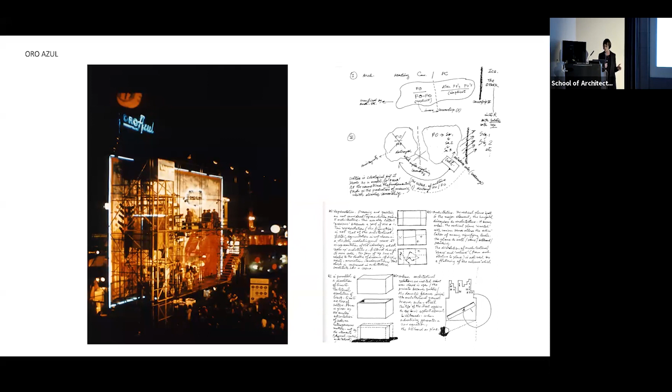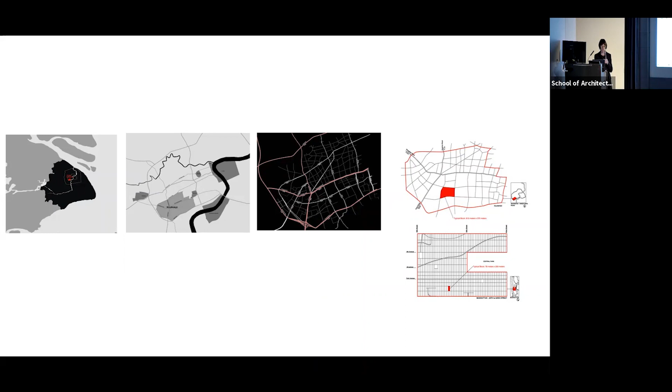The important thing is that this was a place where many concepts were explored. It was about creating disparate connections between different areas. Actually, if anything is about reading the city, this was it. In a certain way, there are also questions of the narrative of each of these places. We started this with Mario Gandelsonas — when I talk about projects I did myself, I'll say so too. And here there were 6 different areas that we dealt with in detail.

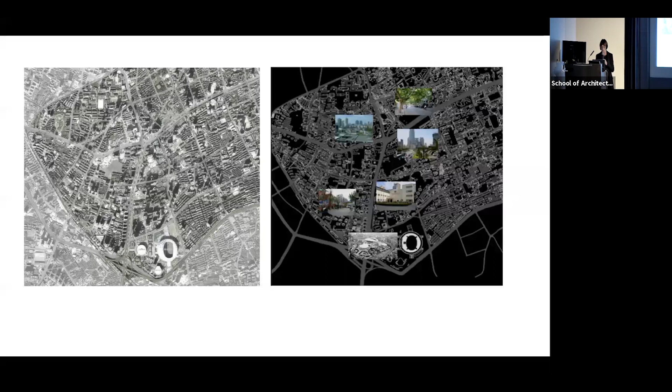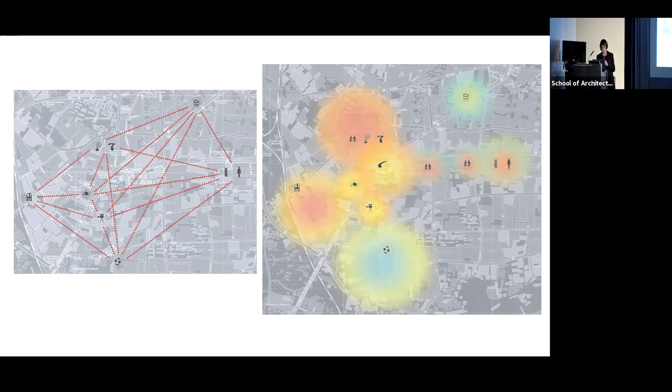Here they're represented — one of the issues was to establish, first, the concept of network, and second, the concept of point of energy, a kind of urban acupuncture, whereby these otherwise disconnected activities and narratives across a very large area — a sports center, an antique center, a technological university, traditional Chinese medicine and modern medicine, a business district, et cetera.

Here's a plan that shows these different elements. It's like organs without a body, or a body without organs, whichever way you want to take it. So you go from the mega sports area to the fabric of the design antique area, to the film center, to a business center, to a Xujiahui Square, which is enormous, and so on and so forth.

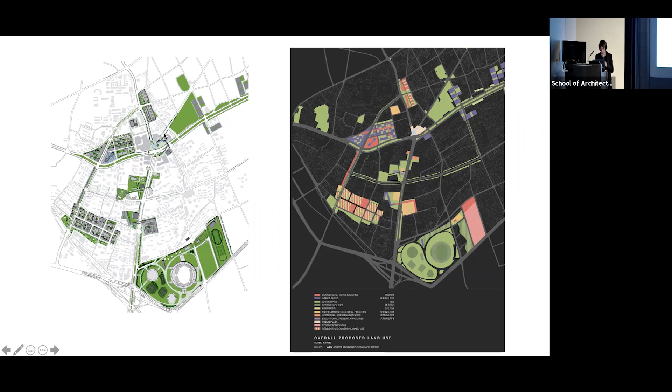Here's one of my preoccupations that was always there: the green. This is not nature in any transcendental way, but there was very little there, so that's one of the things we addressed. And what's on the right, more importantly, is the multi-layer aspect of this plan — going from the different land uses done in a more systemic way, but also traffic, sustainability, and any number of other layers.

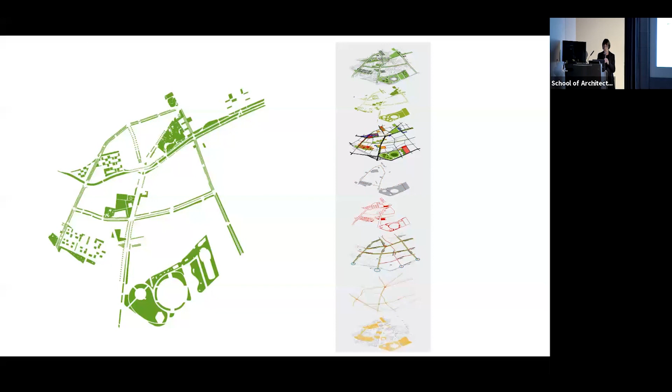So I'm going to show just three of the projects that we focused on. One being the Xujiahui Square, which was — I think it still is, I just saw an aerial view, haven't been there in a long time — a major traffic intersection, a nightmare, surrounded by malls, a very commercial area.

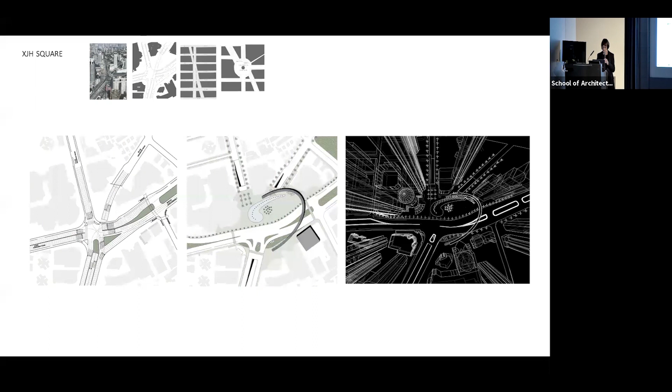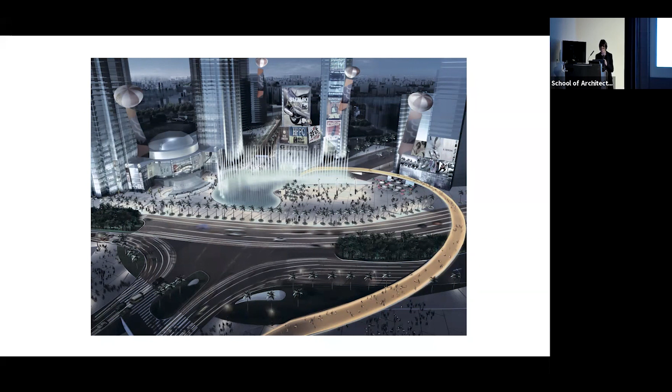So what the project proposes is actually to make a place of spectacle, covering some of the roads at the intersection and emphasizing the pedestrian in this sea of cars — like those highways you see in postcards from Shanghai, edged with lights, and a mega fountain inspired by the Bellagio Hotel in Las Vegas, with its dancing water following music. We thought this was very appropriate for this place, very popular, and as you can see here from the scale of people, that was enough to get things going.

Most importantly is the place itself — really one of the aspects I realized has appeared throughout the work as a preoccupation in every project: that of spectacle, and the city as stage, the city as film, et cetera. This actually seems to be pretty consistent.

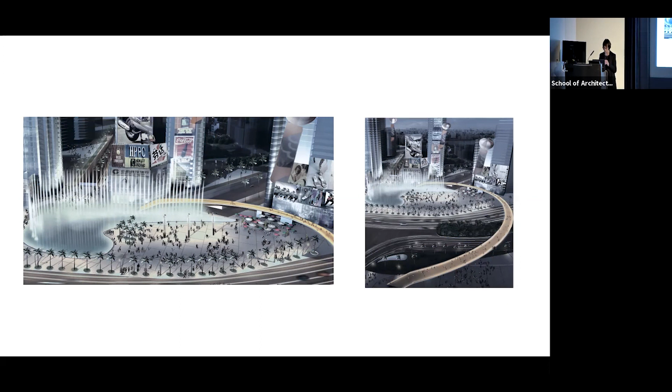This one instead takes a different reading, which is reinstating fabric — a lot of fabric has been erased and demolished, particularly around the city center, leaving just the garden there. So this is creating the Yishan Design District as a new fabric.

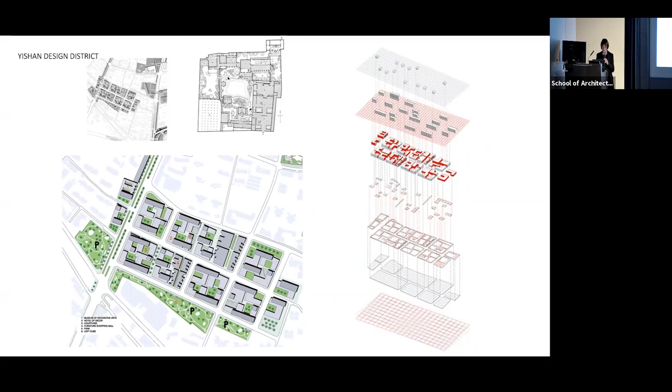You see on the right how it was produced, starting from reading the Chinese gardens — their sequence of spaces, the relationship of transitions between open and closed, the edges that are established, the boundaries. I could go on explaining what makes a fabric, which you can make even with objects like here. It doesn't have to be attached to the edges of the street — there could be other things. You can still have a sense of fabric if you have the right ingredients.

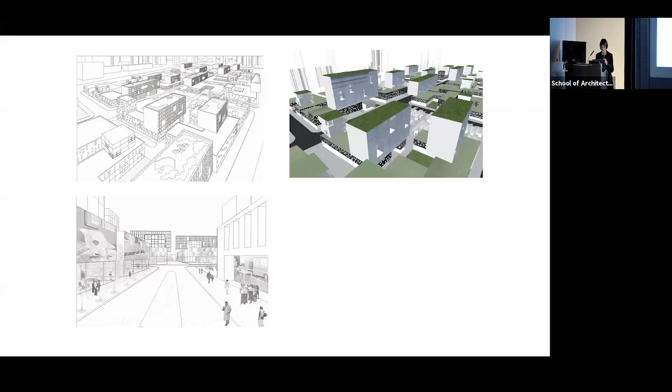The next one is Film City. All of these things we proposed — no one gave us a program, so we started reading the city and proposing what had to be done.

Film City includes the old studios, part of the extraordinary tradition of Chinese cinema, and their actual production — the Shanghai Film Institute. They produced In the Mood for Love, for instance, though it was made in Hong Kong, and many other extraordinary films.

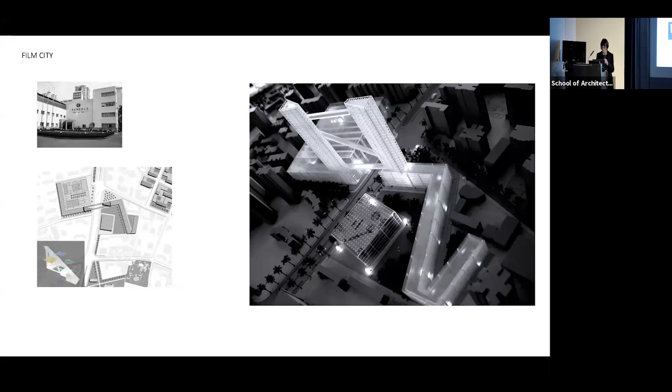Here, again, the building becomes secondary to the city in a sense — it's not one object, it's an assemblage of objects that mixes with the fabric. Here are some close-ups as it bridges the street with a multiplex, cinematheque, hotel, production studios, museum, offices, and more. So there's an enormous number of elements that would otherwise separate the city, but they're all put together as pieces of assemblage immersed in the fabric.

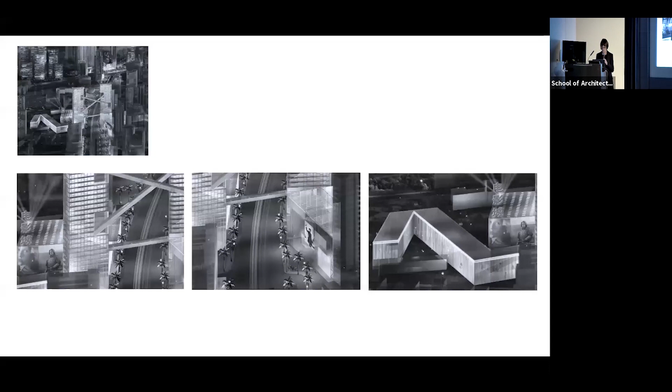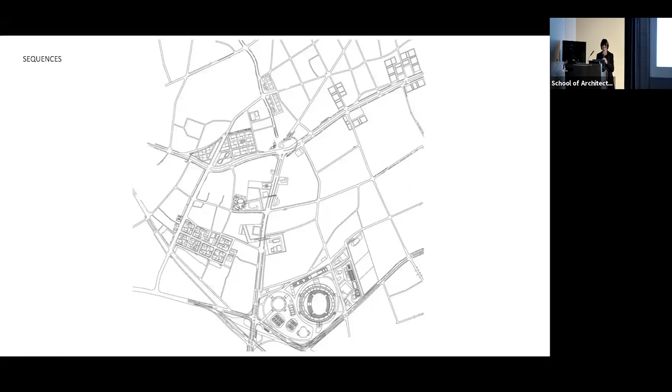Here's one of the most important concepts for me: that of sequences, and sequences of different narratives across the different areas we proposed — creating new narratives as they're linked together, whether by foot, by a shuttle we also proposed, or by any other manner.

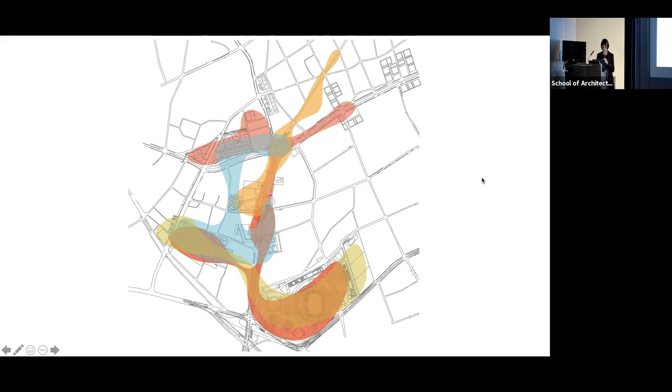And here's the activities, which we call 24/7, daytime and 24/7 on the right.

The Return of the Repressed Nature, I put there because that's the essay I wrote after I did the project. It is from architecture that I always do theory. I don't do the theory before, unless somebody asks me for something. So it is also The Machine in the Garden, China Basin.

And so this started from a literary piece. It was an invitation from the San Francisco Museum of Modern Art, which invited 5 teams of architects to propose a project for an exhibition called Visionary San Francisco.

Now, what I asked myself is what's visionary in the city today? This was '89, and I answered myself: no buildings, no buildings. The reason I answered that was that in every city there are a bunch of buildings, a simulacrum of some fantasy Manhattan, but there was no city there, no urban culture, nothing. It was purely about consumption.

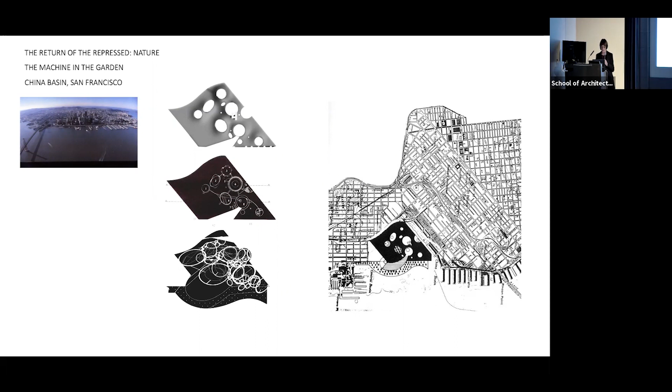This project, I want to read what I wrote, and this is just my own. It started as an office project for the exhibition, but then it became my own project. Not only did I do it for the exhibition, but I developed it later. The city as object of desire is transformed into the city as a place where the force of desire is set free. The China Basin Project, much like Donna Haraway's Cyborg, is about transgressed boundaries, potent fusions, and dangerous possibilities.

This project is a provocation. It is, to paraphrase Haraway, a fiction mapping our urban, social, and ideological reality, resolutely committed to partiality, irony, and perversity. It is antagonistic, utopian, and completely without innocence.

So here's a mantle of green that covers this enormous surface, within which there are courtyards where different programs, all about production, are housed around it. In between, there's no determination, where they mix, like in the city.

In a way, I thought of it more recently, these like Radiant City in reverse. It goes down, the green is up, the fabric remains there below.

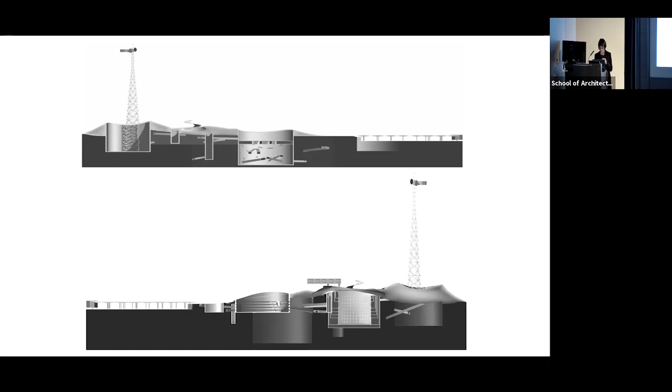And here are the sections, or 2 of the sections, where you can see these — they're very deep actually, almost maybe too deep. It's all public, accessed from this public place on top, the green, and the city just runs underneath. The way to circulate through it is through this set of mechanical circulation systems that go up, down, sideways, diagonal, etc. So it's a machine in the garden.

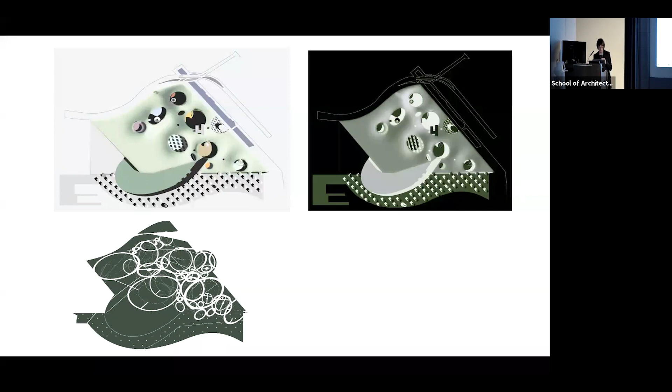And this is a photo montage I did later. I'll try to read it, but you can read it too.

Nature and the machine join in the creation of collective territories, residues of the forces that traverse the subject. The memories, the emotions, the rationalizations, the history, the stories, and the assumed knowledge are fixed by lines, by marks that project the force of desire, the survival of an experience. A movement flows through earth and body, reaching through the gaze into the depth of the universe, in the framing of infinitude, in the folding, collapsing of the sky onto the earth, through edges, borders, the borders of the body. Orifices and borders are the makings of a body. Border, edge, and frame capture and lose focus in an oscillating movement between the recognizable and the unknown. The trace of a body of woman that embodies desire is itself and the other. Woman as gender constructs a new nature.

And now we make a big, big jump here, and I'll tell you why. We go to New York City, to the South Bronx, and the Melrose Community Center, which was the first community center to be built in 36 years. And the corner where it was built was the most dangerous corner in all 5 boroughs at that time. I went with no problem every time.

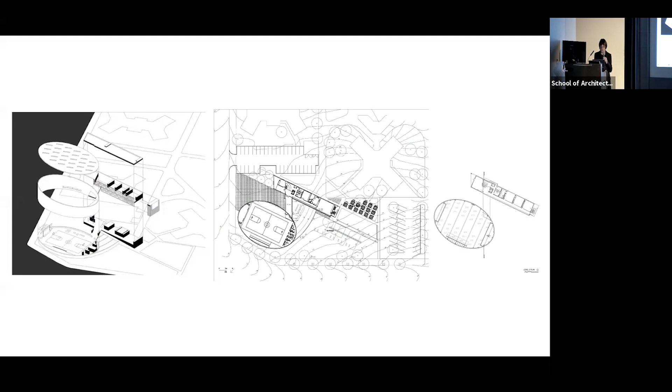So basically, here's the plans, and it's very simple, but the context is what's important, because it is in the context of 3 housing projects: Melrose, Jackson, and Morrisania, one of the toughest ones in the city. This open field, as you can see in the site plan, was like the wind would blow you away. Here we have an object in the land of objects, the objects I criticized in the previous project. But these objects, this housing, in relation to early modern urbanism like Radiant City and others, had still believed in these buildings, this housing, this object with the green, as a social contribution, as something that has to make life better for everybody, for those who couldn't afford the luxury of other modes of habitation, as opposed to towers in Dallas or Houston or anywhere else.

Where the principles of the modern movement have really been appropriated and distorted.

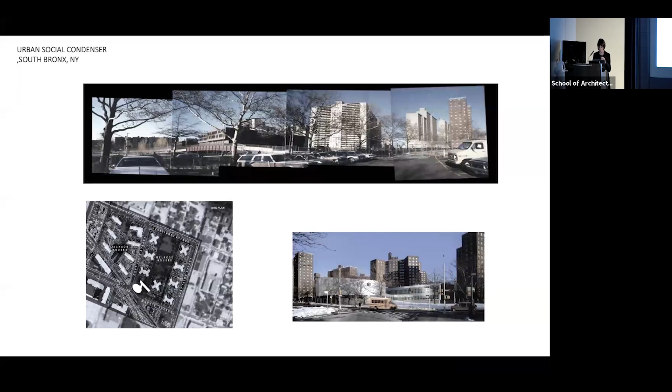So this is 2 parts: the ellipse, which holds a corner addressing the 3 housing groups, and the bar where all the activities of the center take place, education, computer, etc., what they do in a community center. There was an area addressed to teenagers, but this is actually used by everybody, with a link in the center that can separate day and night, so the center can keep on working while the bar is closed.

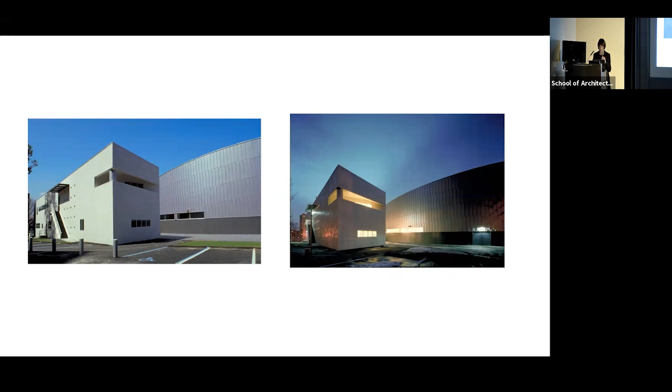One of the most important things about this project, which was done with a very, very small budget, is that New York City Housing Authority selected us, out of many interviewed, in the Design Excellence Program.

And what is most important here is the proposal of having a curtain wall, because this is a land of fear. Everybody's hiding, barricading behind walls. So when I proposed this, if they would dare, we brought 3 alternatives. The idea was very simple. It's like paranoia: if you don't know, your mind keeps on going. So if you see, maybe it's better. The idea was to be seen and to see, to take the fear away of the other, of the unknown, or the known but feared.

And so the community, represented by all women, African American and Latin, an extraordinary group of people, just ran with it. I said, maybe we can put a grill. No, they said, no grill, no defense, nothing. If we're going to do it, we're going to do it. Nobody ever broke a glass. And so here are the circulation and the classrooms. You see, classrooms are glass too, and they're painted bright colors, so they can actually be seen day and night.

And here, the street is reinstated, and here, 2 volumes again, playing with each other: one is the sports area, the other a big gymnasium, multifunction. In this project, what's interesting is that the activity rooms, the classrooms, are placed randomly, shaking papers to locate them. So people can use any room, the circulation is informal, so that the formality of teaching and classrooms is put into question, giving freedom to those using the spaces.

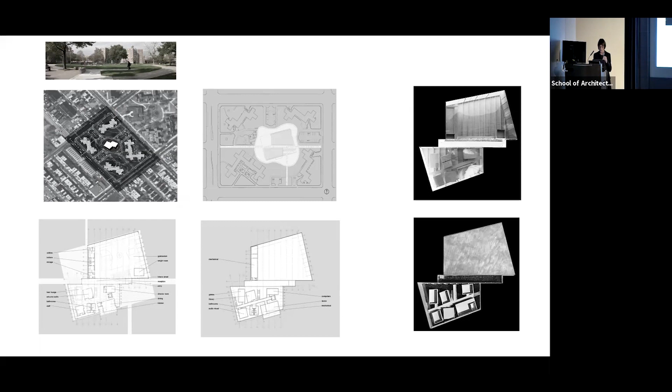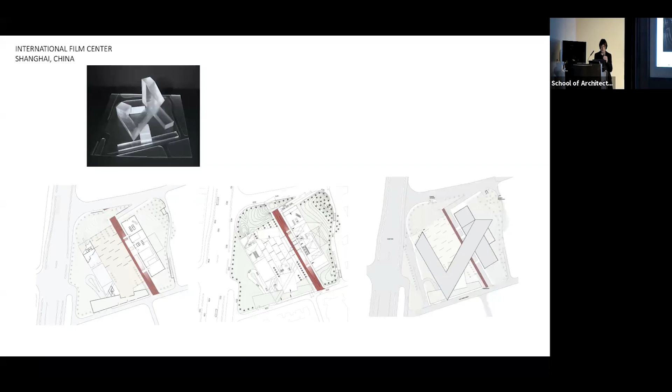And so we go with the city. After we did the master plan, we were asked by the Shanghai Film Institute to do a project for them. So this is the International Film Center, in the same location, but different now given the actual possibilities and commands. The interesting thing here is that this project is marked by 2 bars bridged by another, continuous, like a film. It's a continuous band with a montage of different activities, different narratives. The program is very varied, and it goes from the same as the one I explained before.

The museum becomes a very prominent element up here. And these, just like a film strip as they used to be, no longer are. And every place, including a film street, a film theme street there. And every place, the public place becomes important. This is what interests me.

The permeability of the private by the public. That's in every project that we've done, urban, even houses. The private is permeated by public, literally or conceptually, depending on what the project is.

Here there's this huge plaza, and you see here with the fountain. And here's the detail of a section with, for instance, in this case it relates to a museum, but they're offices. They're done in such a way that with the stairs it could become also a screening place.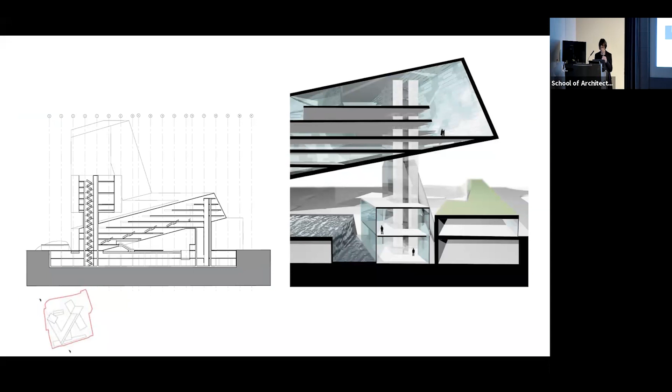And here is the spectacle again. They have a red carpet, so we did a red carpet which traverses there under this bridge. But the most important thing about this bridge before the red carpet is that the bridge is there because diagonally on this side was a construction of a subway line under it. And so I love the idea that the city literally runs through it under.

So here the bridge is not the bridge that was in the first proposal, but it's a bridge that's both continuity, but also relates to the fact that there is this infrastructure. And the red carpet, of course, addresses spectacle, and of course the VIPs and people watching. And on this other end is the museum, film museum, with screens outside.

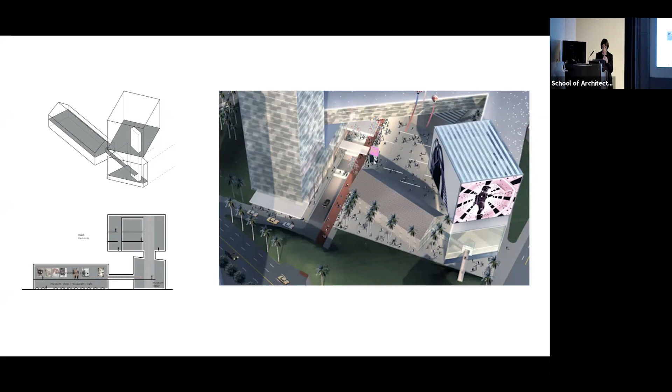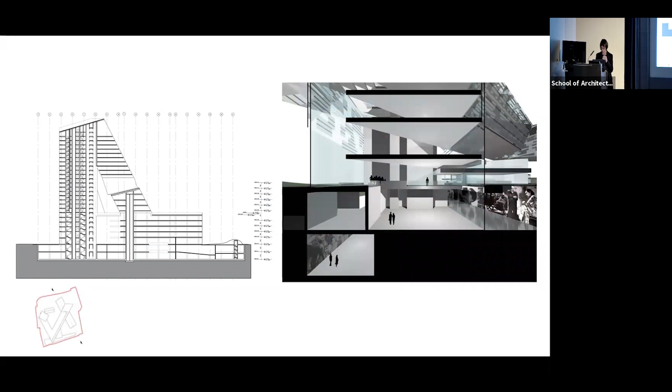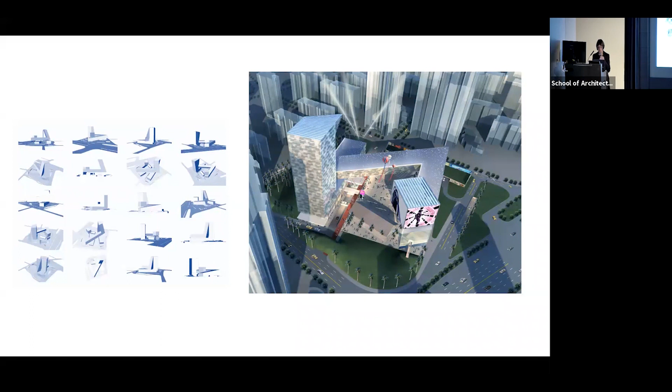And now it is the activities and the fact of, we're going back to the green, but now it's something to do with the fabric. So the city is here again, as it runs through all these projects, but now the green has come in. This is the fabric in the garden, and it's not the machine, it is the fabric. It's in Boulogne-Billancourt, which is half an hour from Paris.

Here are the first sketches that had to do with using the existing fabric, but adding a grid, American style. This was a competition with several stages. Then on the left, the sketches are, these are Mario's sketches, which I love. They are traversing the fabric, the way of cutting through, exploring possibilities. But in the end, the French don't like grids like that.

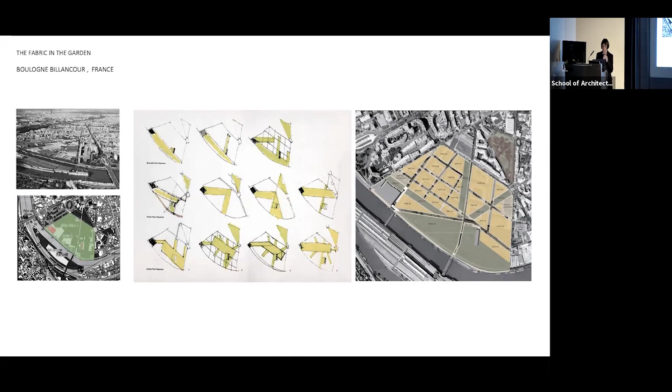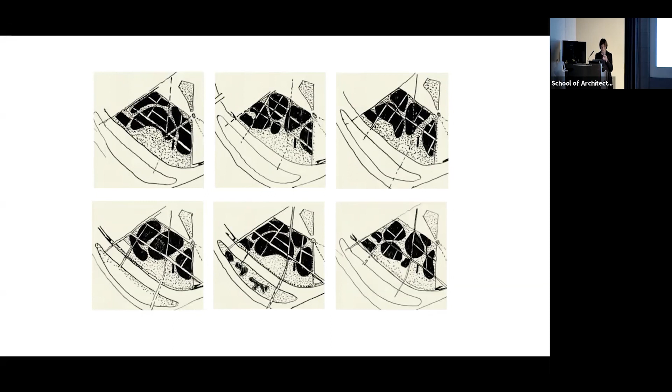So after the first stage, this is what I did, these are my sketches. One of the things that have appeared in other projects, and then appeared here again, is a displacement between the streets in the fabric and the fabric itself. So here, islands of fabric, but the streets continue. They're based on that grid, but they also relate to the fabric around. So these are all variations.

And this is a project that was proposed. As you see, every place here has both street and green as an integral part, not as a support, not as a leftover, but as part of a flow that runs through the fabric. Both streets and green run through this fabric.

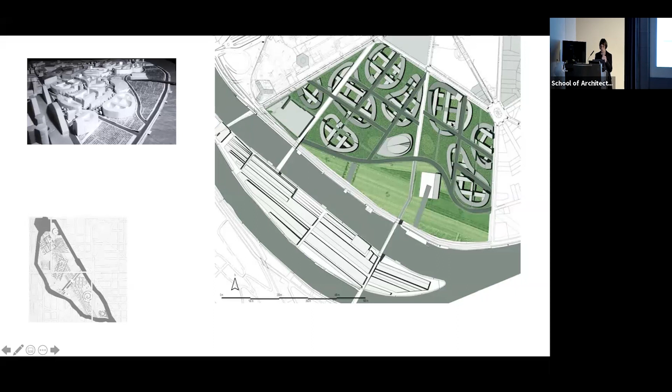And on the bottom there's a ghost of a project done many years before, which is what we call fabric as object. So instead of object as fabric, it's fabric as object. Here is a speculation, close-up and a section. It's on the edge of the Seine, and there's many more aspects to this project that I'm not going to dwell on. And because we have green here, and fabric as object, now we have houses as object.

This is a farm, and this farm is in Uruguay, in South America. It's a gentleman farmer's farm, of course, but it's a farm. It's beautiful, I love big views and horizons, that's my fantasy. So here's actually a cluster of buildings done one at a time and framed, as you'll see here, with a view from one house to the horse stables there. I didn't put the riding ring.

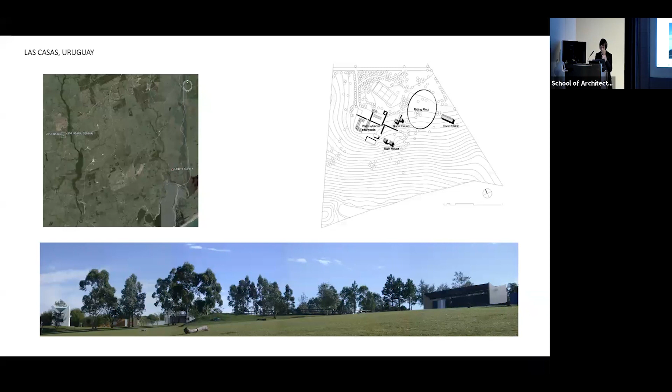So this is, it's not a full house, they're all like pavilions. This is the main house. And there's a little window, it's an homage to John Hejduk, the horizontal window there, right here. I was very conscious of that, it wasn't an unknown influence, I just did it. And here's more views.

So it's very simple, they're just these cubes that remind me of some of the estancias, the old houses with this very basic geometry and porches. And then I did a lot of work on windows, finding ways to deal with the windows and shutters, but I'm not going to get into that. But here's one of the views.

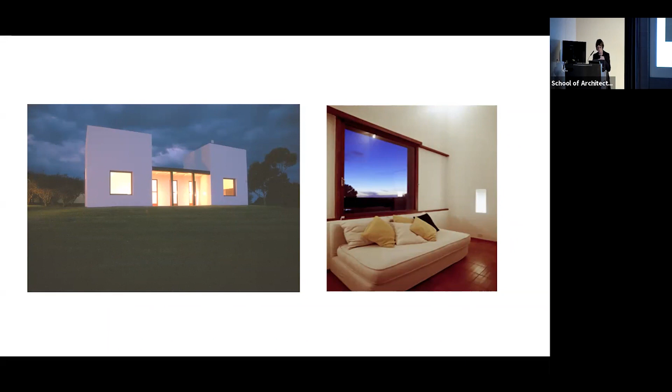And these are more views. Under this gutter, there's a big recipient to collect the water that goes down and is used for irrigation. And the construction is very simple, standard material.

So this is now a general view from outside and one from inside. And here come the walls that frame everything, creating a sequence again, only now between these little objects that are private, but there's still a common ground. So here's a wall that separates the main house from the guest house.

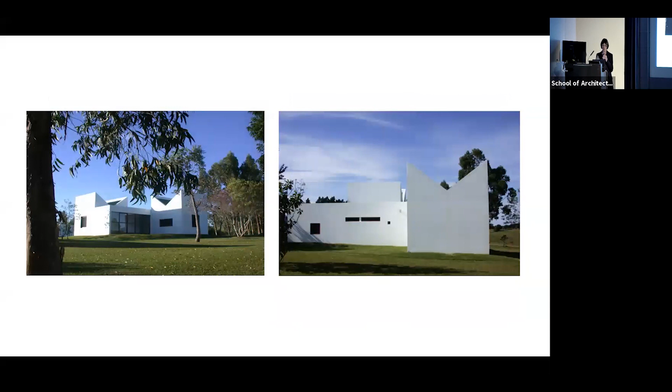And the guest house takes that motif, but it's a variation. So they're all variations, oscillating between Barragan and Mies.

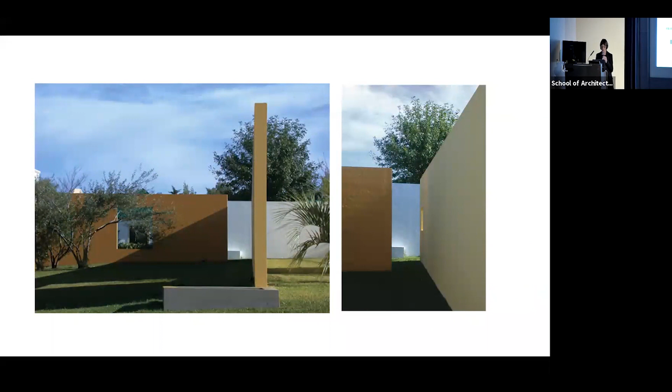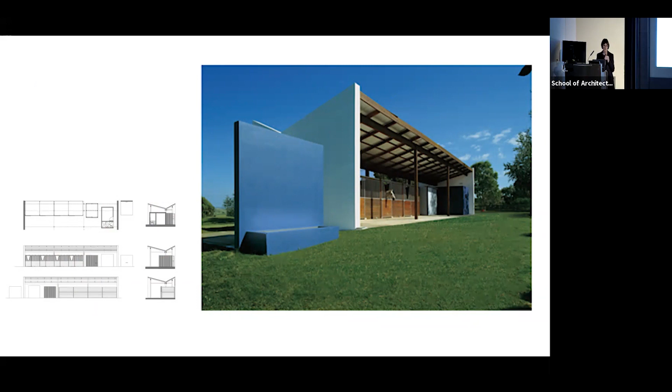And then comes the stable, the horse stable, which is my favorite actually. I gave the horses windows so they have a view. I just love that.

And then now we're going again to where the green continues. Here we're in Des Moines, Iowa. We've been working, doing vision plans 1 and 2, for almost 30 years.

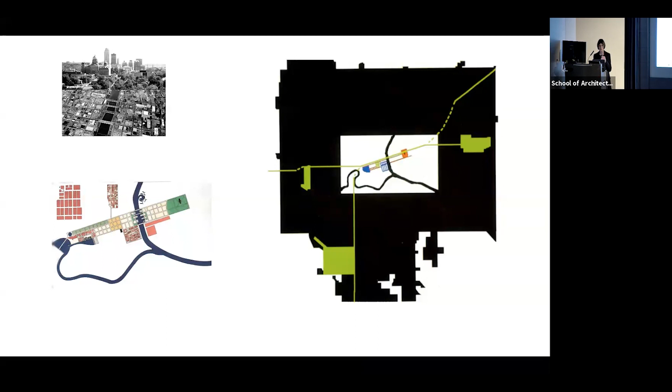And in the first vision plan, right here downtown, there's a long park that was called Gateway Park at the time. We proposed to replace the used car dealers, with the plastic flags flying there, which was the first thing you saw entering from the airport. And it happened. The interesting thing is that it was always the community and the city together, everything we did there - great planners, a great city planning department, and a fantastic group of people in the business community.

And here's a Chipperfield building, a library, and now there's also a Piano building. So this park has inspired a lot of architecture - these are occupied now, and this was already done as green. This was actually occupied with some banal park that somebody had done before.

And so came Mr. Pappajohn and his wife Mary, who have an extraordinary collection of sculpture, could be in any top museum, and wanted to donate it to the city, but to be seen publicly. So we came up with the idea for the park.

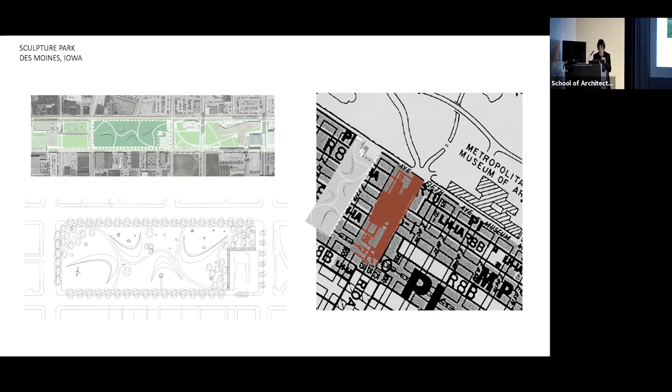Which basically is creating, first of all, getting out of the flatness of Des Moines and creating an undulation, but at the same time creating open rooms for the art and ways to discover it behind these mounds. And then down here, these are Plensa, Scott Burton, and Morris - you've got the best stuff. Down here is Piano's new building, which is an art center, actually.

And here's other views of the sculpture and people, and that's a view of the park. And so this will take me...

...to the last project that's still in the works, which is also in Des Moines - an urban agricultural corridor. This project actually tries to bridge, once again - we were instrumental in the cultural corridor with many interventions.

The city has changed. The city is full of fabric now. It was like parking lots, now lots of great restaurants - even the east side, which was like the bad part, now it's like the cool side. It's amazing how the city has transformed through the first vision plan and the second, which became law, actually.

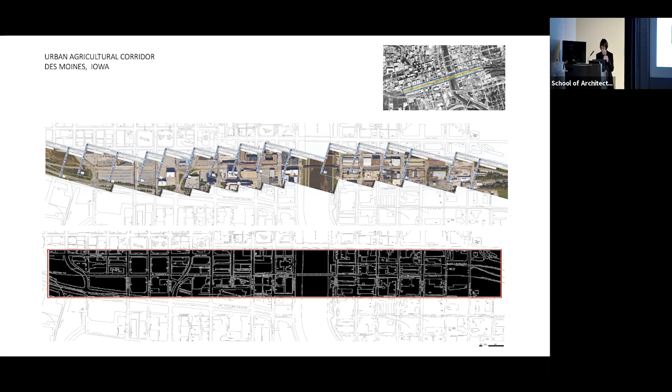This one is still in the making - it's a very, very long, 1.5-mile agricultural corridor. You see here both lines - this agricultural corridor bridging the Des Moines River, which separated east from west. The story of Des Moines is that money flew west and they left the inner city to be 9 to 5 and flattened, which has a whole other story to do with the decentralization of the American city.

And here is a linear development of greenhouses that articulate between existing buildings and bridge that separation. It has orchards, it has greenhouses, and there's actually a railroad track that goes through - this land is really unused.

So this is a proposal to create that. As you see, there are greenhouses, science, innovation, orchards, farming, a market, and sports. They're connected to a school eating program, a food program, and a homeless shelter where people are going to get jobs and produce their food. This is going to give jobs to a lot of people, create local food, and incentivize more food programs in the city, as well as some landscape features producing plants for the city itself.

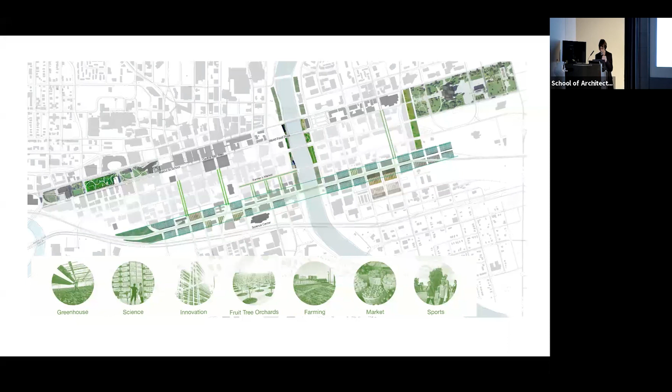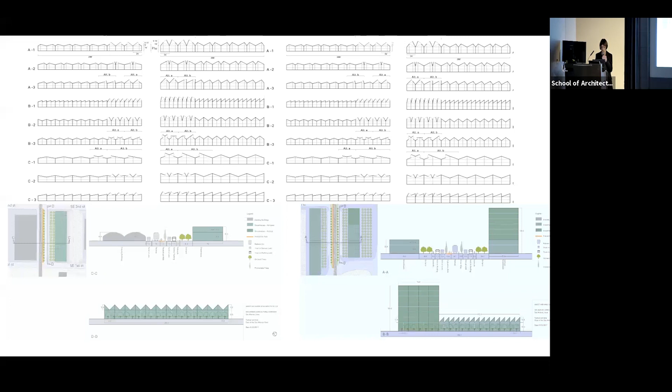And the greenhouses are like modified found objects, because all we want is standard greenhouses that we can slightly modify to achieve different functions and to have a movement. So it's not just like a whole uniform line there. And some are high also, vertical greenhouses that as they exist.

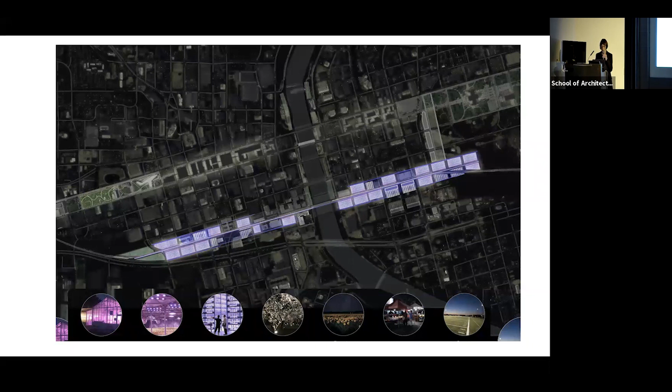I don't know what we do with the lights, or Kurt, do you want to come up? Oh, do we have no chairs? Mauricio? We don't have chairs. You will think you get a standing ovation instead.

I can stand here. Coming up. Wonderful, Diana. Thank you very much. You certainly deserve more than a swallow of some kind of grateful element that will sustain you.

Thank you for a wonderfully precise, extraordinarily wide-ranging, and highly stimulating presentation in which you demonstrated step for step that what everyone sort of takes for granted and associates with one thing or another, a wall, a curtain wall, etc., can be sprung from their bondage, as it were, in the conventions of our culture, and that therefore can become something entirely new.